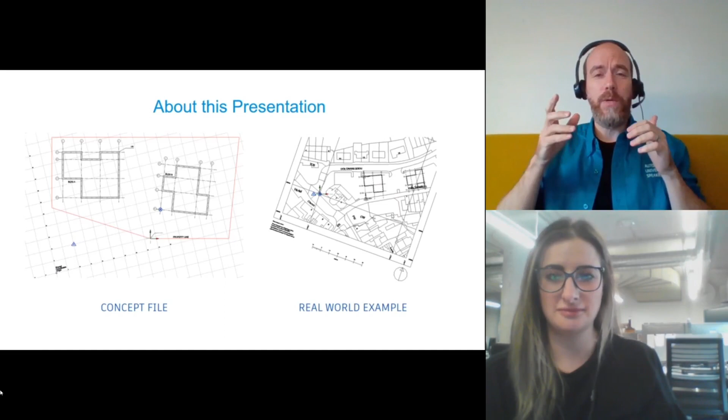But the other one, people ask me again and again, okay that's the concept, but how do you apply it in a real world example? In this case, I took an example just like I would have done when I was working in the UK. This site was situated in Wales, using a real coordinate system, and I tried to set it up and show it to you. So hopefully this is giving you guys a bit more of an opportunity.

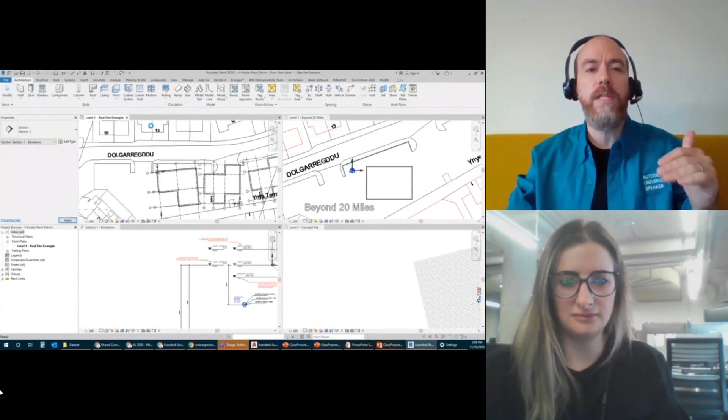So the whole question of clipped or unclipped things, a lot of this will come up. Let me just maximize this. There we go.

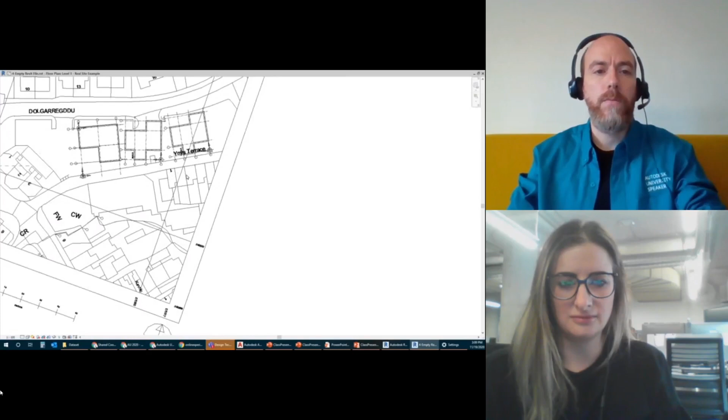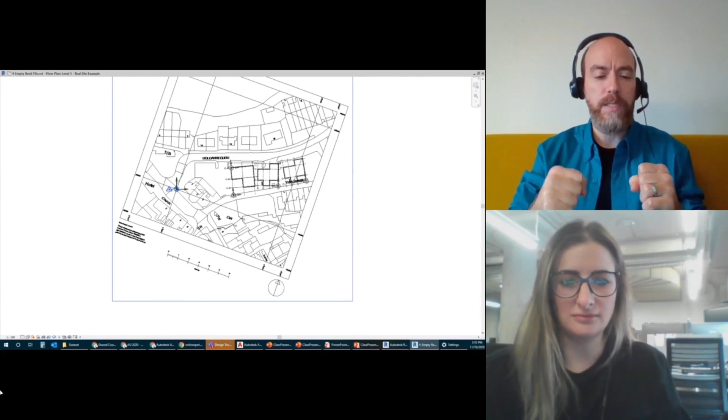A lot of this will be, if it's unclipped, the coordinates can update and it doesn't move or stay in its specific spot. The one issue you may have is that if you do a zoom extents, you may end up with something like this, where your survey point is located in the real world origin and your file updates. Besides that, in my experience, it doesn't really matter if it's clipped or unclipped, other than the fact that it's going to lead to you having to do things like this, where it's way off to the side and you have to zoom in.

But the actual behavior of acquiring the coordinates, it shouldn't affect the actual acquisition of the coordinates.

Awesome, okay, next. So the next one that we have here is a little bit longer, so I'm going to read it word for word for you.

It says: most of the surveys we receive are in a localized coordinate system. When we start a Revit project, we simply link in the CAD file using origin to origin and then acquire its coordinates. We then unclip the survey point and position it to a relevant boundary. We carry our checks between the CAD and Revit model, and everything seems fine. Does this process seem okay? We don't normally get issues with the 20-mile mark.

So the 20-mile mark - okay, so if I understand what they said correctly, if the files are located locally and you're linking them in, and you're not getting any issue with the 20-mile limit, as long as those files are being linked in... because they said they have localized files.

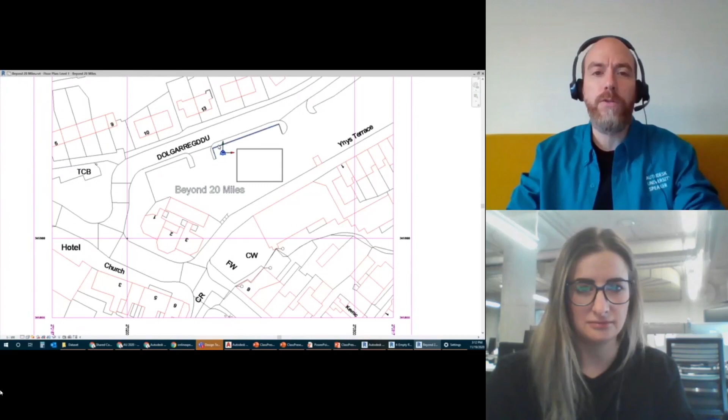Because there's some people that have linked in files and said, oh, there's no real problem with it, because you can see I can link in the file and everything looks fine about it. And this was a file where the background is blocked because it's beyond 20 miles. But if I actually zoom in here, what you will start to see is multiple lines, and you can sort of see how there's a secondary - the lines are not actually lined up.

That's because the CAD file in the background is actually jumping around. So you can see that even though I traced that CAD file, that's actually what's going to geometrically happen if things are beyond 20 miles.

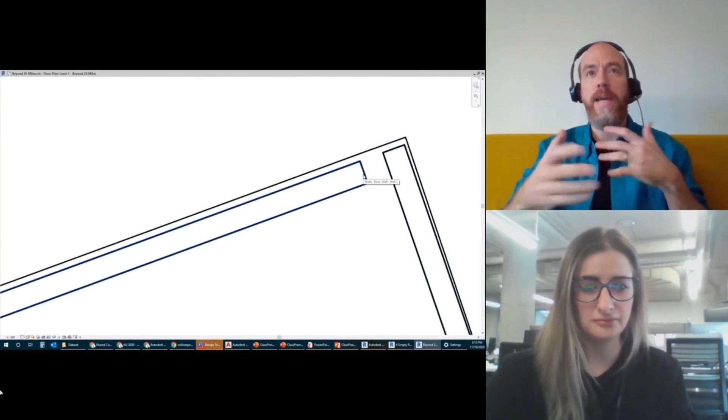If you're linking stuff in and it's actually coming in fine where it is because it's been localized, it's not beyond the 20-mile limit, you're probably okay.

The main thing, as I try to explain in all of my recorded sessions, is as long as whatever the coordinates are that you read off that survey file - if you're trying to put in a spot coordinate on it in CAD, and that same spot coordinate you pull inside of Revit is the same - it typically is okay.

But what I would do beyond that, going back to whether it's okay regarding the 20 miles, is look at your CAD and see if it's doing this jumping around. If it is, you may still have a problem with it, because graphically I'm not certain if this is actually going to be okay and whether or not the coordinates are going to report correctly, because right now the CAD is jumping all over the place, so I don't trust it.

That's why I localize my files.

Okay, awesome, thank you. The next one we have here is, how does shared coordinates affect Navisworks and IFC formats? Okay, they do affect it.

Like I said, there's so much to cover inside the session. The main thing to understand in doing that - let me see if I can show you guys a quick example here.

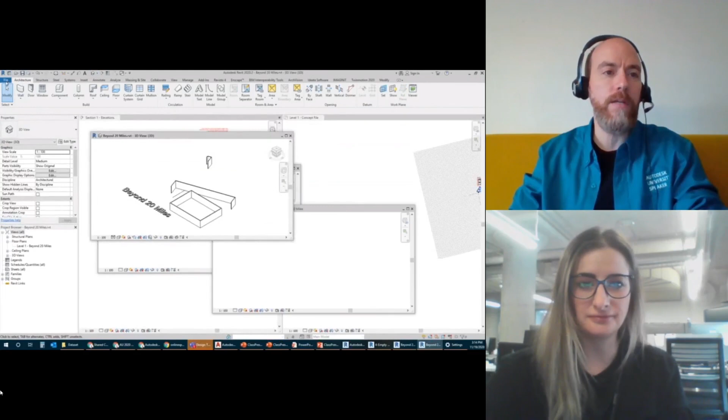So if we were to jump into this, I'm just going into a 3D view here, so that whenever you go in and you're exporting, either to Navisworks or otherwise, there are settings in here. Typically what you want to do is have your shared coordinates set up for your site.

Let me bring it back onto my screen here. So where you see coordinates shared - I actually opened up the settings within IFC as well. I'm not going to demo it on screen, just conscious of time, but there are ways that you can set it by shared coordinates as well.

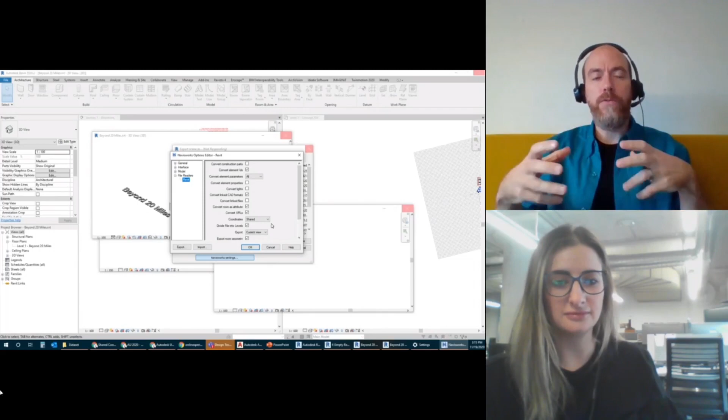This is, again, if you're dealing with stuff where you're trying to coordinate things across real world examples, like a site, all set out in the real world, you'll want to make sure that's all set to shared, and have all the consultants working off the same thing. Then your Navisworks files will all drop in right on top of each other as if they're out in the real world, all coordinated. Because if you don't do that, they'll all come in origin to origin and be all over the place, and you have to manually align them all.

So, without going into too much detail, that's basically - yes, they are still affected that way.

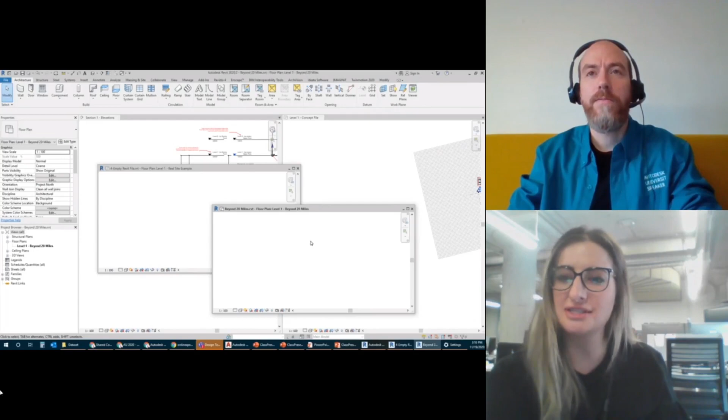Awesome, thanks Craig. So the next one we have is: why can't I modify or publish shared coordinates on BIM 360? I have a civil Revit file publishing to the architectural Revit file, which then publishes to all other discipline Revit files. I set up shared coordinates and publish prior to uploading to BIM 360, but sometimes the building moves during the process.

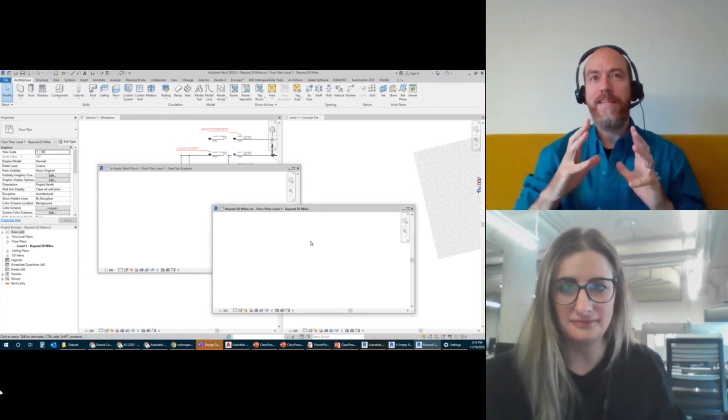I'm not officially from Autodesk, so I can't officially answer that question. I actually happened to catch a conversation on Twitter where somebody was saying the same thing this morning. I don't know entirely why BIM 360 acts that way.

The publishing, from what I've understood, won't work because, as I've said in my session, publishing is reaching into the other model and pushing that information from your Revit file into another. For some reason, BIM 360 doesn't like that. However, the actual acquiring of it, because it doesn't affect the other file, you should be able to do that.

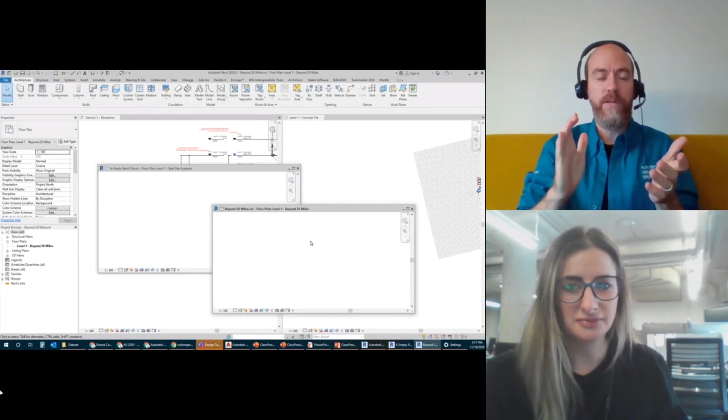But updating the files later on, that's unfortunately where BIM 360 won't let you change the location. For example, you can't grab the building in the site file, move it into a new position, and save that location back, like you normally could on other systems like Revit servers and network drives. I believe you can still go in and update the coordinates at a specific point, but you'd have to go into each and every single model separately to do that. So it's an unfortunate pain.

I don't know - Autodesk might have an answer for us one of these days, or they might update BIM 360 to allow it. But at this point, publishing on BIM 360 from one file to the other isn't an option. Awesome, thanks Craig.

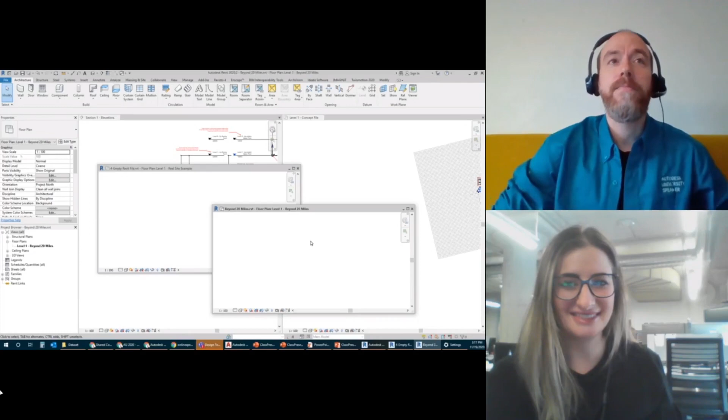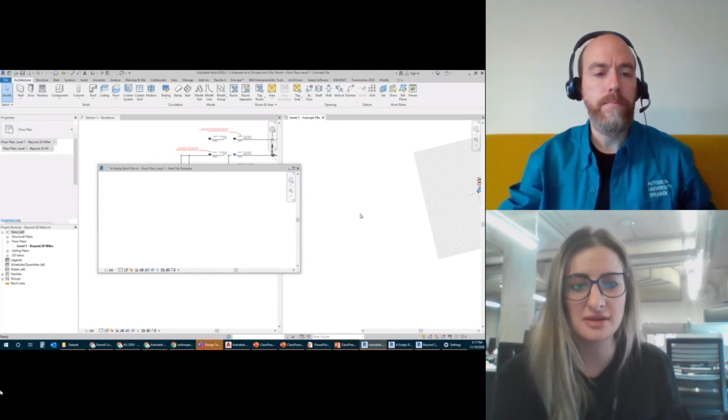So the next one speaks to a couple different questions actually. They want to know how multiple buildings on the same site are affected by shared coordinates, and what's a great process to set that up - for example, a campus site that has multiple different buildings and different shared coordinates per building. What does that process look like? Okay, and that is a lot of what we already covered.

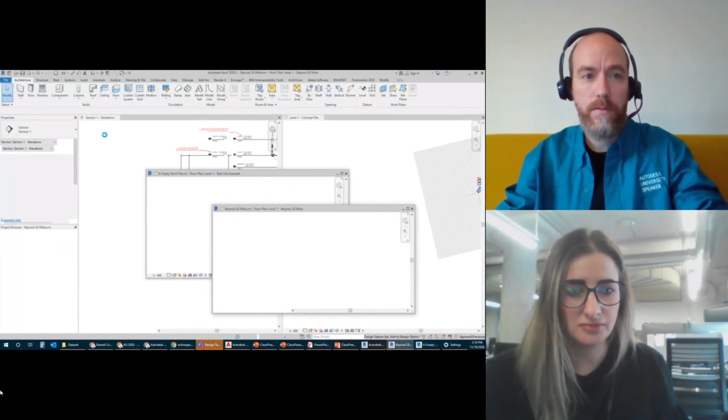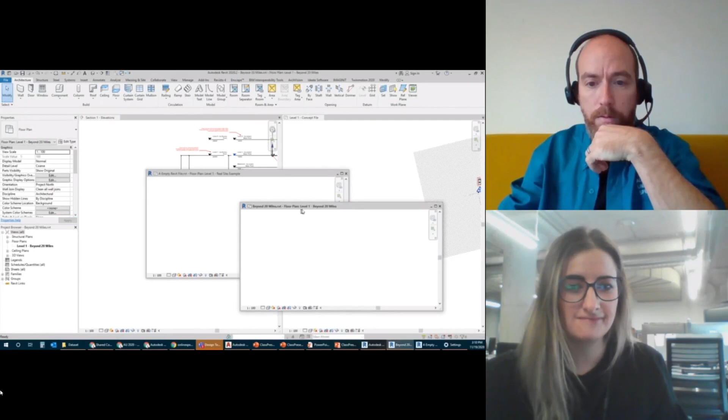Let me just see if I can bring it back here. We've got the concept file - there we go. Let me just get back to my... hold on a second. So in my tutorial that I did in my main class, if you haven't had a chance to view it yet - let me go to an example of a concept. Hold on a second, where is it... sorry, I'm just making sure you guys can see. In my main class, that's what I covered off - how to actually set up a building on the site. Let me just bring that up.

Oh yeah, there we go. Sorry, it was zoomed in so I couldn't see it.

Okay, so dealing with a site file, campus file, I think was the question. The main class I've got, if you haven't watched my full video tutorial which is one hour, explains how I would go through that process. I would typically set up my site file, which is kind of what I have on the screen here, and with that I would be linking in my separate buildings as separate Revit files that are linked in.

Somebody made a note that they've been trying to convince people for years to do a site file that's separate from a building file. I always did this because you can set up your site file using shared coordinates, setting up the real world coordinates so you can specify here's my setting out for my whole project. I know this is a real world coordinate. You can drop in spot coordinates and see how they relate to whatever real world coordinate systems you're using, and then position your buildings on that. If your buildings update at any point, you can go in and update the coordinates for them and they move around on the site.

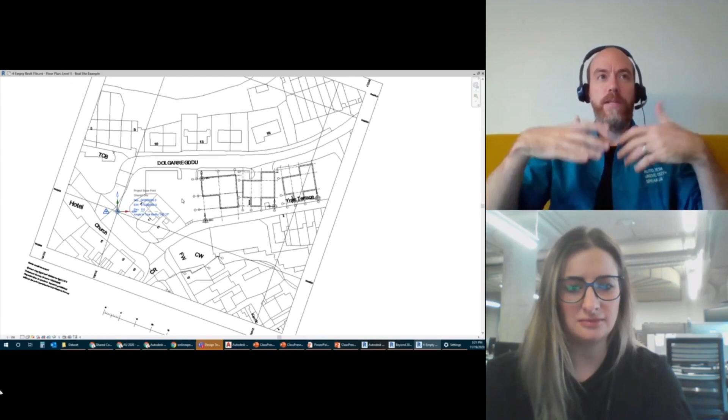As a very basic thing, it's one of those where you should watch the video tutorials, download the files that I've got in my data set, run through that process, and it should give you a fundamental understanding of how to set it out.

The next one is maybe a tricky one for you. Have you ever had to coordinate with a point cloud file? And if so, how did you deal with the 20-mile limit? Did you have to truncate the point cloud site datum?

Wait, so the second part of that, what did you say? The point cloud - had, yes, how did you deal with the 20-mile limit? And did you have to truncate the point cloud site datum?

Okay, if you're dealing with anything where it's point cloud data, in all the models we've worked with, we've typically set them out using more local coordinates - they're not set out at miles from their origin.

I personally haven't - going back to the initial part of the question, have I worked a lot with point clouds in real world coordinates? No, I haven't. But typically if you're running into issues with 20-mile limits, try to get the data back closer to the origin point as much as possible. So if for some reason somebody created a point cloud where the actual origin point is miles and miles away, beyond the 20 miles, you'd probably need to localize it.

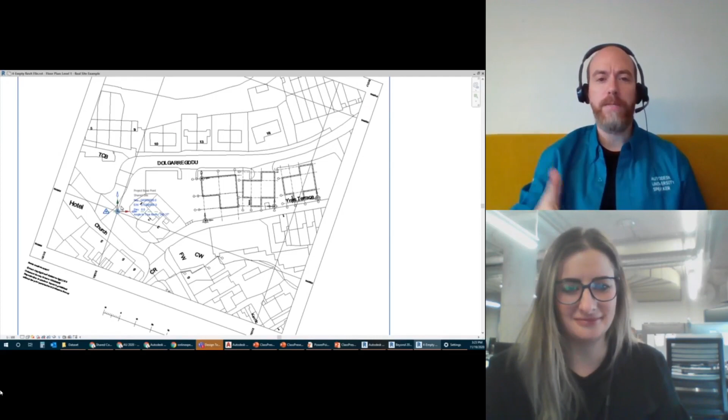Basically, if the files are not set up - in fact, as I went through my tutorial, I even showed you guys that if the structural model here within building A and the building A architecture don't actually align because they were created with two different origin points, you basically just at some point have to align the two. One of them has to acquire, one of them has to publish. So in this whole thing, somebody is going to be setting out the coordinate system.

So if you start out by saying, okay, the prime consultant is the architectural team and they're establishing coordinates, then once building A's architectural model knows that's the coordinate system, it's actually quite easy to do at that point, even if the files haven't done a handshake at all.

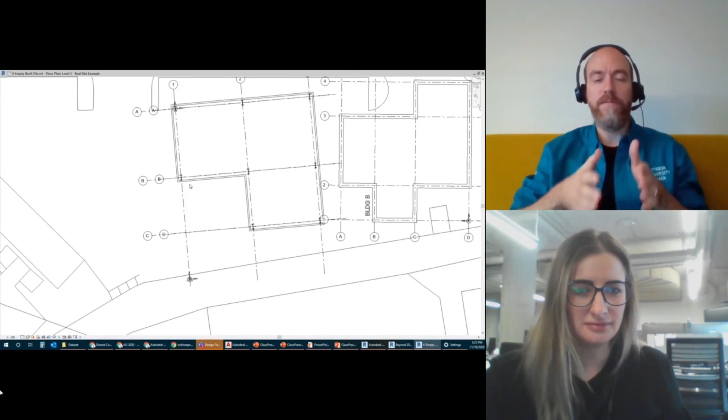Because what will happen is you basically just pick the file and say acquire from this file, and your file will just suddenly adopt their shared coordinates. If you've done shared coordinates, but then the coordinate system updates because suddenly everyone decided this project was set out around a local origin point on the corner of the property line, and now they want it in real world, you can also do that. You just have to go into each file and go through a similar process to what I showed you in the example: pick points and say specify coordinates at point, type in the coordinates, and then you'd be able to align those models back together. So it is something you can do later on in a project. It just means a bit more legwork of going into each file separately and updating it so they all align back together using shared coordinates.

So the next question is more about you, Craig. They want to know if you have your own specific YouTube channel that has no time restraints, so you can start your coordinates sessions there.

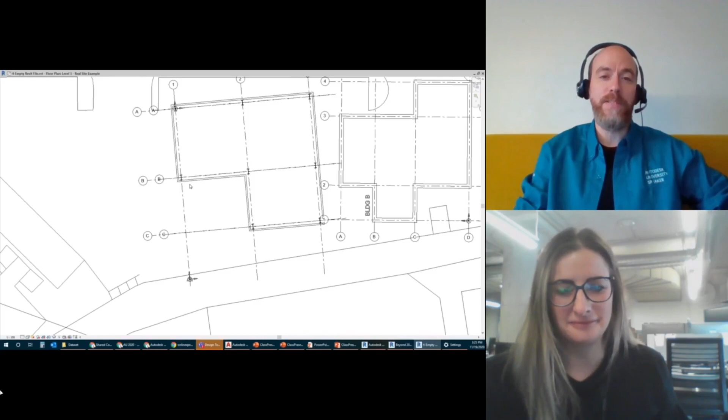To be honest, I haven't actually done that until now. I have now - I've gone on YouTube and uploaded a video that I produced for Autodesk. I've got one video in there so far that's bonus material showing you how to link - it was the one where I started linking the same model twice in two locations. I am going to try to add more videos, so if you search for it, it may take a while until it shows up when you search for Craig, but yes, I will be posting more videos.

Perfect, you have a very lovely fan base here. The next one is more about the process here.

So it says: I link in the architectural model and acquire their coordinates. Coordinates match, base and survey points match, yet when I link in my model, it sits a meter too high. Would that be a physical alignment required on their part, or is there something else I should be doing coordinates-wise?

Okay, so by the sounds of it, if they've acquired coordinates - I'm going to guess structural, for example, or mechanical, acquires the coordinates from the architectural. If they're now saying that the architectural model, if you've given your model back to the architectural team and it's sitting a meter too high...

Check with them that they have linked your model in by shared coordinates, because there are times when they'll say 'oh, we linked your file back in, it's not coming in the right place,' and they actually linked it origin to origin. But beyond that, if they did their job and linked it by shared coordinates, then it probably means that your file, when you were looking at it, looked like it was in the right spot, but was actually sitting - you started your file, for example, a meter higher than they did.

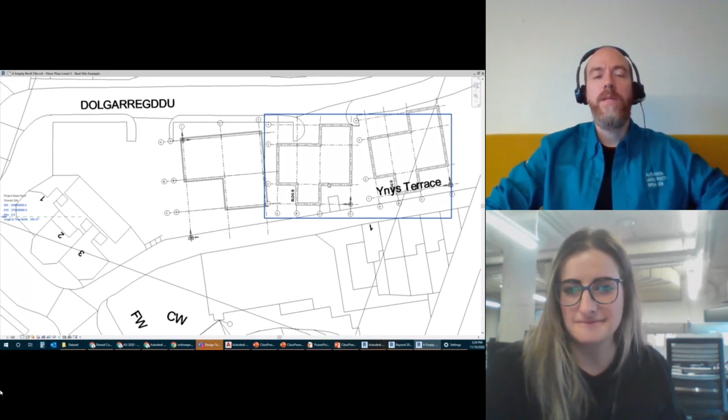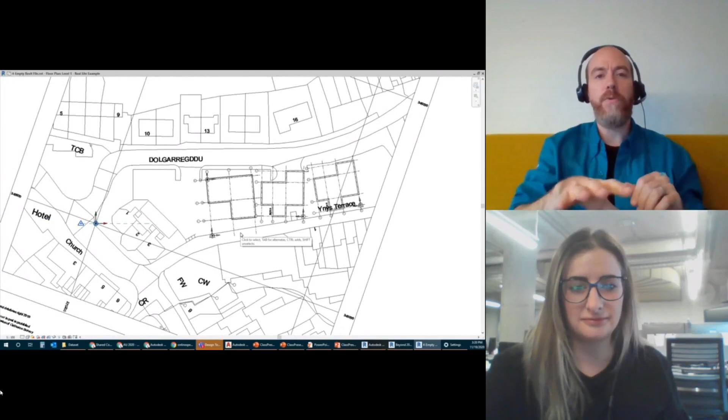It is inside the CAD file, and if you're still a little confused about this, go back and watch the video tutorial on the website on AU, where I show how I localize a file. This is an example. This CAD file in the background has the Ordnance Survey grid from the UK, and I picked a local setting out point, so I had to move the CAD file so that grid line is sitting at 0 by 0 in CAD.

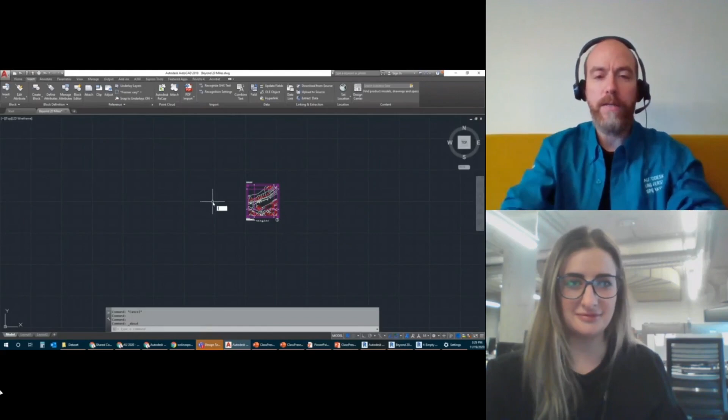So let me go back to my AutoCAD. As an example, if I'm in AutoCAD and I do a line from 0 by 0, you can see it's way down there, right? That's not going to work. That's going to be beyond the 20 miles.

But if I go in here and grab that point and actually localize that at the 0 by 0, as I've shown in my tutorials in the main video, as long as all the geometry is contained within the 20 mile, Revit will not give you an issue. That means changing a survey, yes, but if you're doing it in a controlled, repeatable manner, you can do it, because you can always tell people where that origin point is.

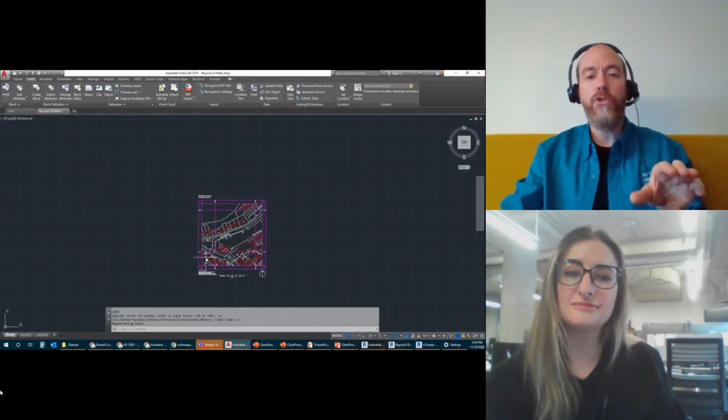Also make sure that if you still get that error, it may be, for example, this one block - that block's origin point is like thousands of miles away. Therefore it's still going to generate that error. So you also have to make sure. I've been in projects where the trees were defined with their origin point like 250,000 miles away, and it still gave that message.

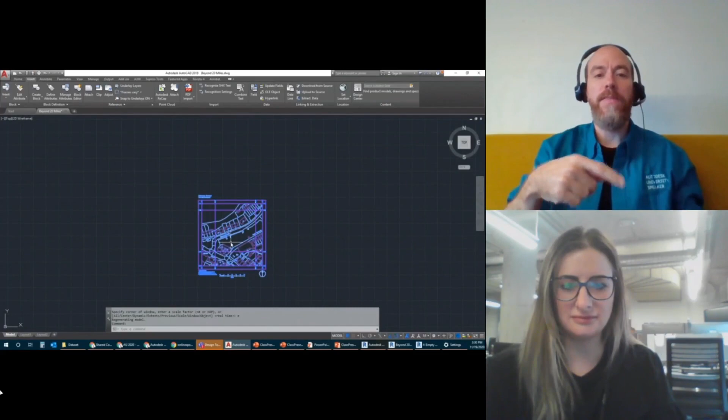So sometimes people will sit there and explode it and get rid of all blocks in the file. I'm not saying you want to do this on your project - please don't do it because people will hate you for it. But if you are in a project, this is something you can do to kind of mitigate that.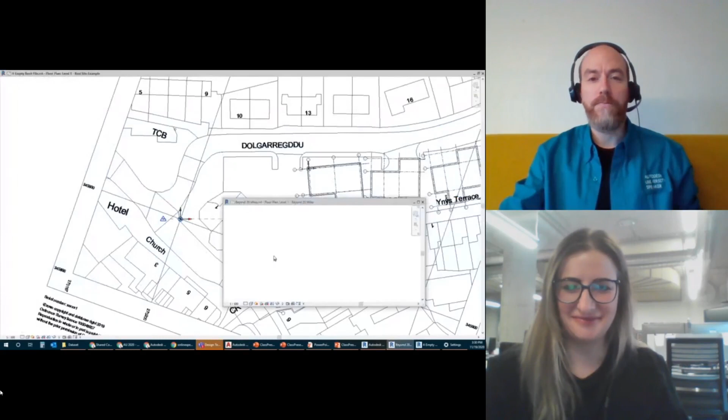Awesome. Thanks, Craig. So the next one is a troubleshooting question, actually.

This is a common one that I think a lot of firms and consultants hear - they say the architect accidentally moved their survey point and now our MEP isn't aligning with theirs. They're saying they fixed their shared coordinates and it's appearing fine on their end, but now our elements aren't aligning to the architectural model as they should. What is the best workflow to troubleshoot this?

This is one thing I didn't mention in any of my sessions, which is worth noting: if you're going to set up something like a common origin point that things are being coordinated around for the project, where you say this point on the project should read this in real world coordinates - as an example, it might be that I use a common point on the grid line as a setting out point, but it might be you say the corner of the property line.

If you don't think your building's going to move around at all, I wouldn't typically pick a grid line because buildings do move - they might shift a foot left or right or something like that - but property lines don't typically move. Pick a corner of a property line, get the spot coordinates from it, put that into the BIM execution plan. Whoever is prime, put it into the BIM execution plan.

That should be your one go-to - if you go to your file and do a report and the coordinates are reading correctly, but the architectural team isn't, then you know who's to blame, and you can go and point that out to them.

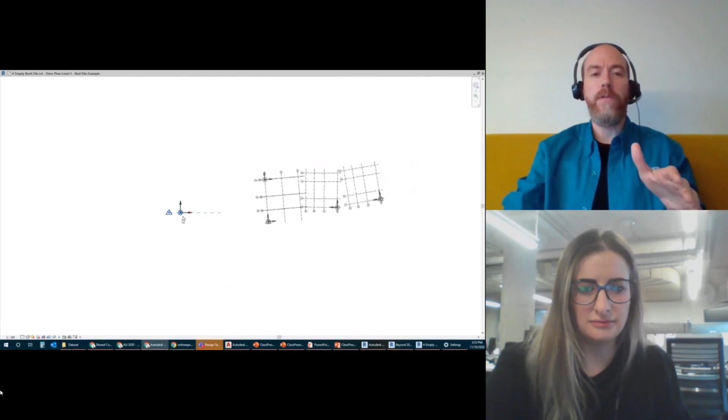In my examples here, I don't typically localize my files by just any point, I want a certain point that I can link. In this case, I link in my CAD files. If somebody gave me, like in the UK, everybody works on the Ordnance Survey Grid, at least the architectural teams.

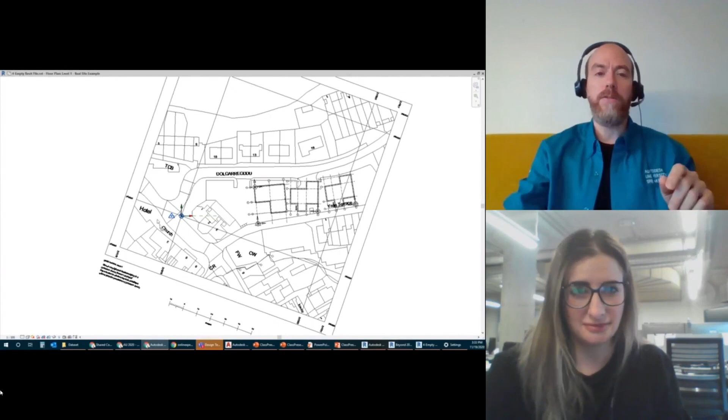Because if you suddenly get a new survey, you can say, well, I want that survey set out on the Ordnance Survey Grid. And if they do that, you can place that marker, this little 0 by 0 marker, on that point. I can do that in any of the files by basically moving it to a certain round number coordinate point.

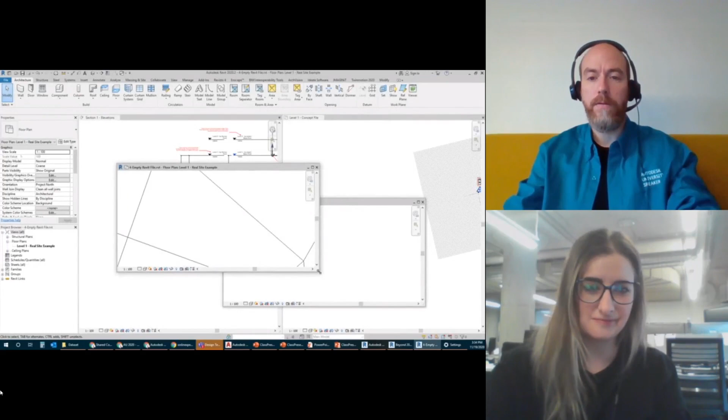So if I actually report on the shared coordinates for that file, let me just see if I can. What you should see is these numbers show up, the ones that are on the grid line. And that's why I use a shared coordinate or a grid line in this case.

If I go in here, no, I don't want to save. If I pick that, you should see those numbers will now read the same as those grid lines that you saw on the outside. And that's why I use that point.

Now, the problem with that is you can't really say that's the common point for the project. So what you may need to do is say, okay, we want a particular point that's actually on the site that we can pick and that is in everybody's file. So you might use the corner of a property line or something like that.

I wouldn't use grid lines because the buildings and grid lines do move depending on the structure of the building as it develops. Property lines are a better place to go. It's something you have to talk to the team about, coordinate, and record as part of your BIM execution plan.

Thanks, Craig. Have you ever encountered hosted families jumping around or deleting while utilizing shared coordinates?

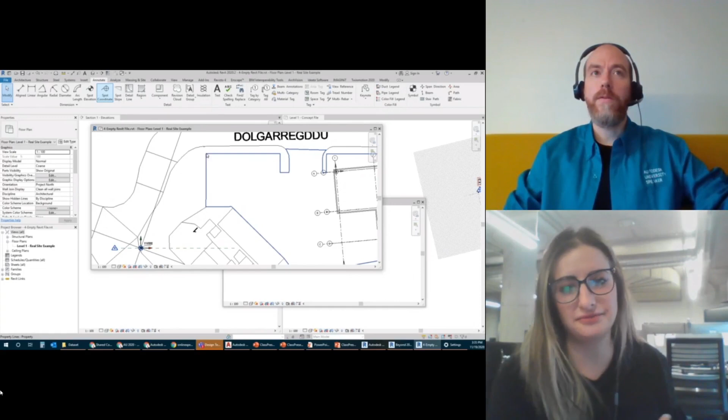Oh, that's one of those that comes up a lot whenever you're dealing with links in general. Yes, for hosted elements, usually if it's hosted to a face, it's typically better than if it's hosted to, like, if you have a wall hosted element, those typically will give you more issues than if it's something face based.

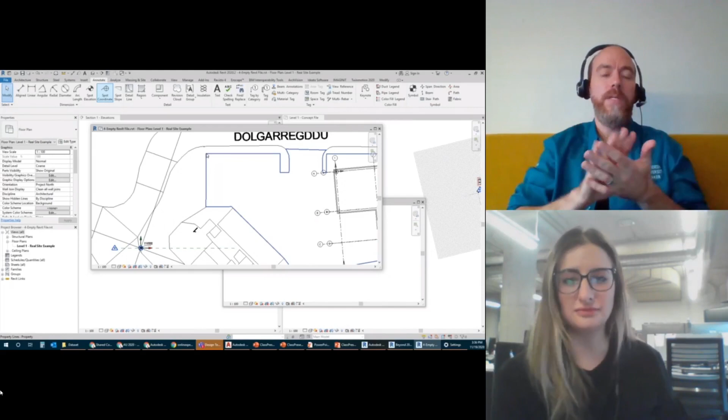But I haven't seen, none of those should move or have issues as long as the files are... as long as the files don't actually separate. This is where it gets tricky, because if you establish your shared coordinates and then as you're working through it, somebody says we need to update your shared coordinates, you may need to disable your shared coordinates, redefine them, and then re-enable them.

And then reload a link to make sure the files don't suddenly separate. But the shared coordinates themselves shouldn't cause a hosted element to move. It's more whether or not the shared coordinates are changed and the files are actually moving together or apart. Does that make sense?

Awesome. So the next one stems from the fact that some people don't actually have the shared coordinates or the coordinate information at the onset of the project. So when they have to go back to the client, the owner, or the prime consultant to ask for this information, what's the key information they need to ask for to set this up properly? That is a brilliant question.

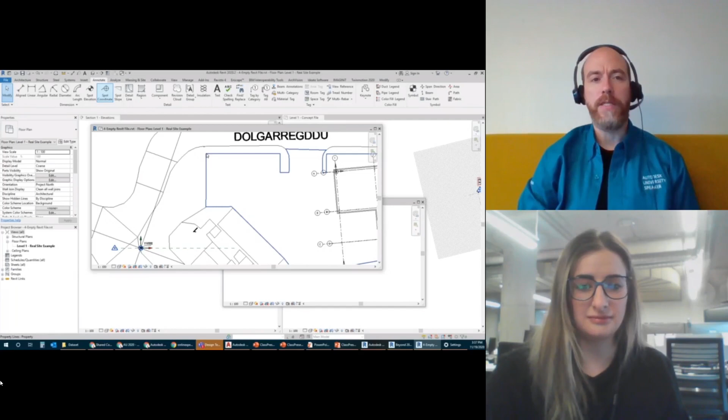And that's the thing, a lot of projects you're working on don't have a common setting out point. This is one where, when I was dealing with this in the UK, it was a lot easier because the Ordnance Survey is their standard grid that the architectural teams worked on, and everybody kind of used it.

So you could very easily start up a project. You were given a file - in this case, this isn't even a survey per se, it's not like somebody went out and measured it on site. This is one you purchase as a general overview, and you could always start your projects with this if you're dealing with a project where you don't know your local setup, you're not as familiar with it, or it's a place that doesn't have a coordinate system.

A lot of this you can research and dig into, and you might have one you can use. You can talk to local surveyors and establish one. But if you really aren't sure, a lot of this is usually set out by whatever the local surveying groups will use. If you don't have a particular site or real world coordinate system, what I'd typically do is pick something in the area, like a corner of a property line, as a local point and start from that.

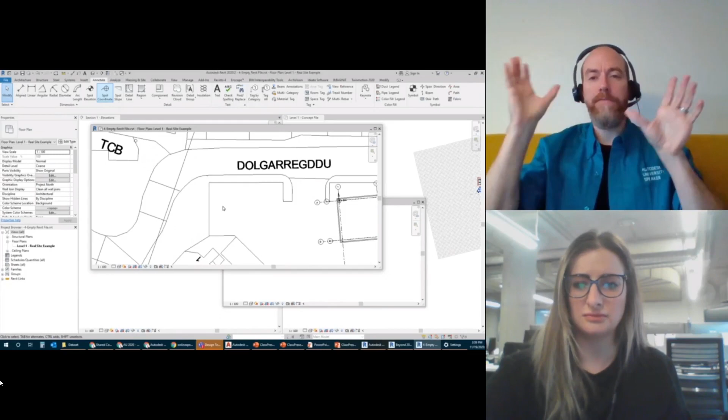You're still better off establishing something that everybody on the team knows as a local point. It's easier because if you just link their files origin to origin, your building could be floating somewhere, and the actual origin might be in the middle of this white space - it's very hard for everybody to spot-coordinate on, say, the corner of a property line and know what that's set out in relation to. So I'd typically use the corner of a property line, or some benchmark in the area, as a starting point.

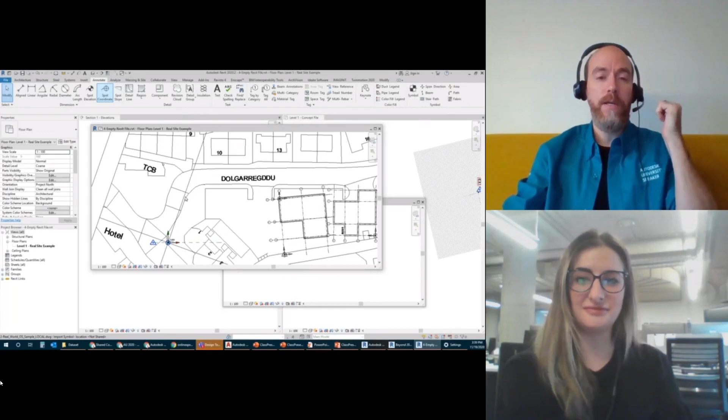And then if things change and you guys get real world coordinates, and suddenly a survey comes in and they say, actually we used a benchmark that's 250,000 miles that way, then you can update your system then. It's a bit of work, but you can do it.

So the next one is actually for a user that isn't currently using shared coordinates, but wants to implement it at their firm. What would you describe for him to bring to their leadership team - the pros and cons of implementing it into their Revit workflow?

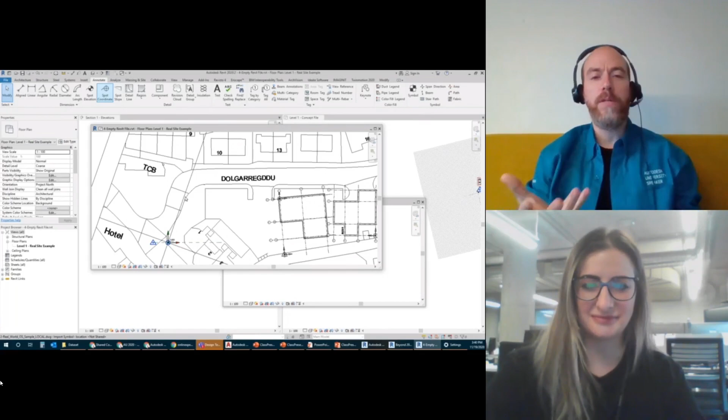Oh, I like that one. Okay, pros - besides showing them my slide deck and pulling a few points out of it, the pros are things like with shared coordinates you want to get everybody on a consistent system. If you have your files just linked in, let's say somebody accidentally moves a file - with shared coordinates activated, it will prompt the user asking if they want to save this back to the other file. It will give messages, and if somebody then relinks the file and you've changed the coordinate system, it actually moves them.

In some ways, yes, it causes more complications, but at least you'll catch the fact that it's happened. I've had projects where people linked them in by origin and never initiated shared coordinates. As the project progressed, somebody accidentally bumped one of them out by 15 millimeters, about half an inch, and nobody caught it. It caused such havoc later because we realized half the project had been modeled 15 millimeters out. So establishing this stuff right up front is better.

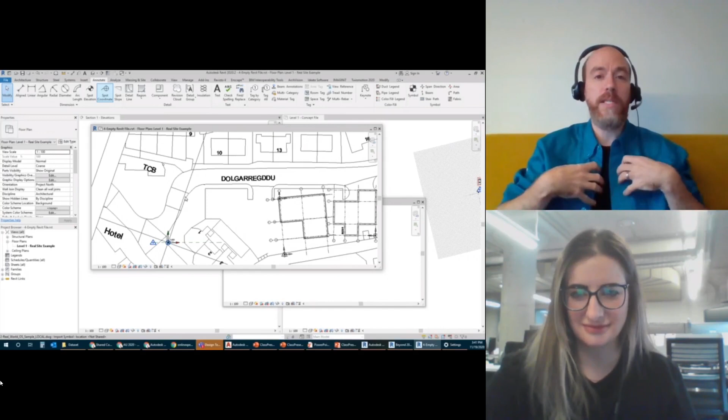The other thing is this is the way the industry is going. If you aren't working on projects setting things out using coordinates now, picture 5 or 10 years down the road when drones are being used to survey the site, or every single project is using a robotic total station to set out exact positions for structural elements going in on site. I've been on a site where they set out every single house by positioning a marker and saying, okay, the laser hit right here, that's where we drill.

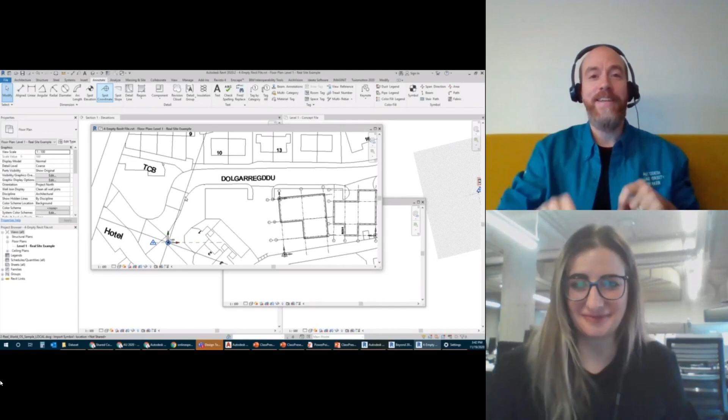So if you don't get that right, as I said in my presentation, you could have a building that sits across a property line, which isn't a good situation to be in. Show them that article and say we want to avoid that in the future. So those are a few of the pros and cons. Hopefully that gives you a sense of it. You'll maybe have to upload that material to the downloadable materials for this course, Krigh. It's a good case for it.

The next one we have—first, a compliment to you. Your webinar is amazing. Is there any way you can make it so that adjusting the angle won't impact any views on sheets?

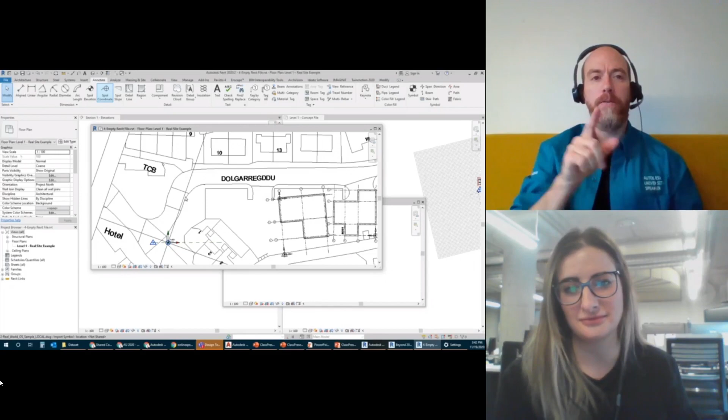Adjusting the angle won't... okay, I'm going to guess what they're talking about. If you're working on your views on sheets—actually hold on, let me bring this up. Okay, your views on sheets. Sorry, my computer is a little slow today. So in this case, if your project is set to project north, right here, changing the angle to true north should not affect any views on your sheets.

If your project is set to true north and you update your true north angle, this will affect your buildings on sheets. If, on the other hand, you're going up here and using this Manage—let's see, is it always—Manage Position and Rotate Your Project North function, if you're using that, first please watch my full webinar where I explain why you shouldn't use that tool, because certain geometry ignores it.

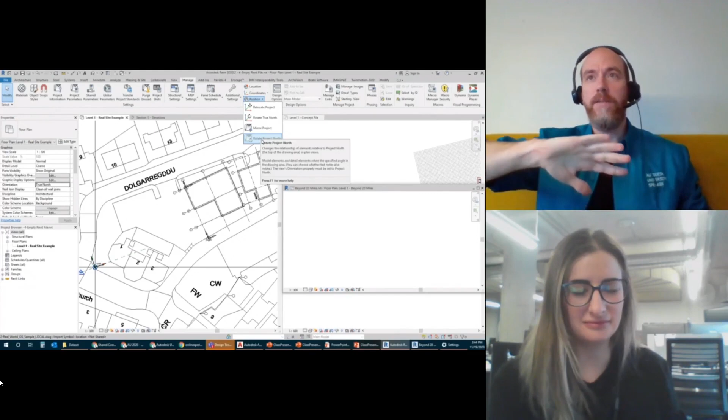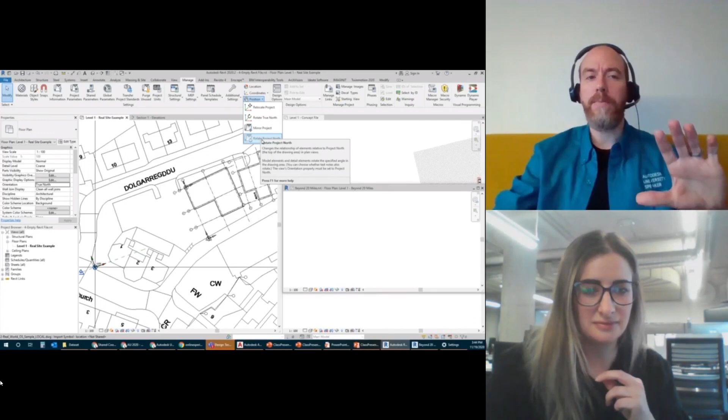But the other thing is that function will affect the orientation of everything on the sheets, and that's again why I wouldn't use it. I typically, if you need to reorient stuff in a certain way, use scope boxes, but otherwise watch my tutorial and the process I go through in my full webinar, and try to avoid using that function. And like I said, if you're rotating your true north, you kind of want it to affect things, because that is the angle to true north. I hope that answers the question.

Awesome, thanks Krigh. So the next one is: can I set up a site placeholder file inside my template file so I can get my view template correct?

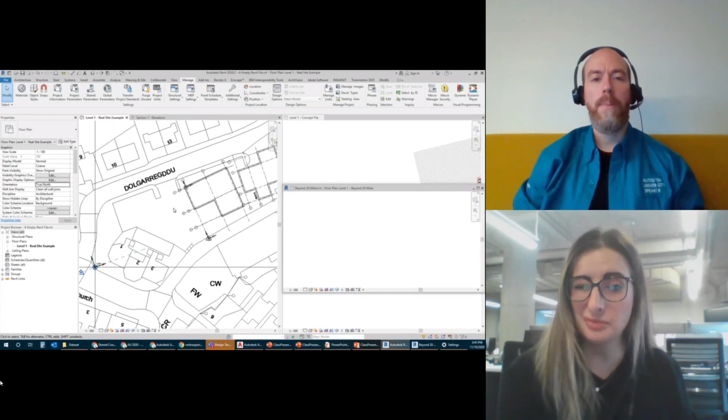Okay, say that one more time. Can I set up a site placeholder file? So creating that site file inside a template file so I can get my view template correct.

Yes, because in some ways your view—okay, so you can set up your view templates, you can set up your site file so that it has everything oriented. The only thing you won't be able to do is actually set out your shared coordinates.

So in this case, like this is where, for example, going back to my example that I've been using, that's real world here. Hold on, let me just go back to here. This one doesn't want to get off the screen. Hold on. Okay, there we go.

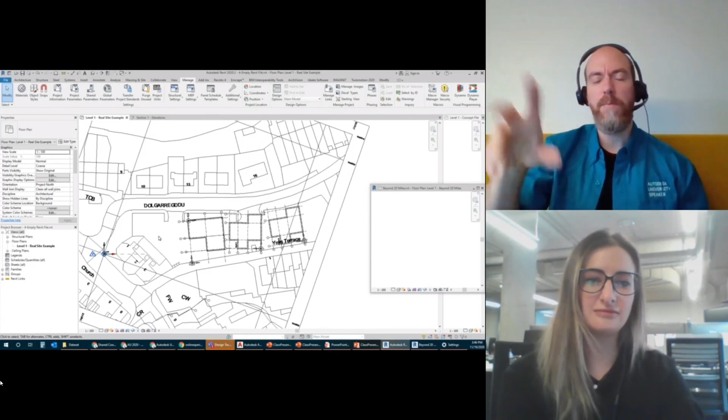This right here is my project north. Okay, so this is my—you can kind of see this. I've got a reference plane in here, and you can set up everything inside the site file. Put in your view template, you could put in graphics, you could put in a couple of basic elements. The only thing you're not really going to know is which orientation is true north. That's what's going to be set by your shared coordinates at a later time.

And if you're doing it inside the site file, the other thing is you can set up your view templates how you want them to be laid out, and then you're linking the buildings into that and positioning them like little Lego blocks on your site file. So it doesn't matter which way is up for them—it really is about you just starting your file here.

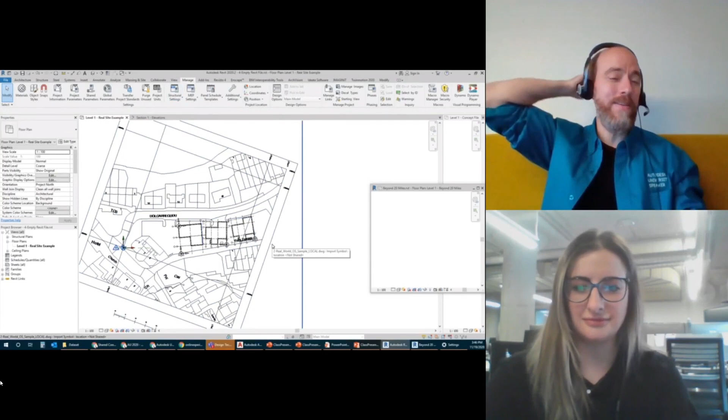And in this case, as I showed you guys in the full session, this file here—the CAD—is actually rotated, so the actual orientation for everything going up is what you see here. So you can set everything like that, and in theory you could even have that as a view on a sheet ready to go. You might have to change size or change sheets, but it could be set up that way.

Awesome, so we have a three-part question for you. It all ties together: how does coordinates apply to model elevations? When I acquire coordinates from a drawing, does it include a Z coordinate? Does that mean it moves the survey point away from sea level?

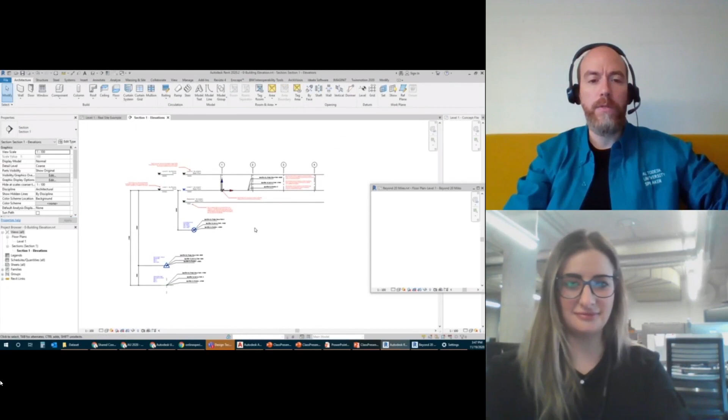Okay, so the first part is elevations. If any of you guys haven't downloaded the full data set, go to the AU website, back to the page where you found the link to this webinar, and you will find the data set. Inside that zipped file is how everything works in elevations.

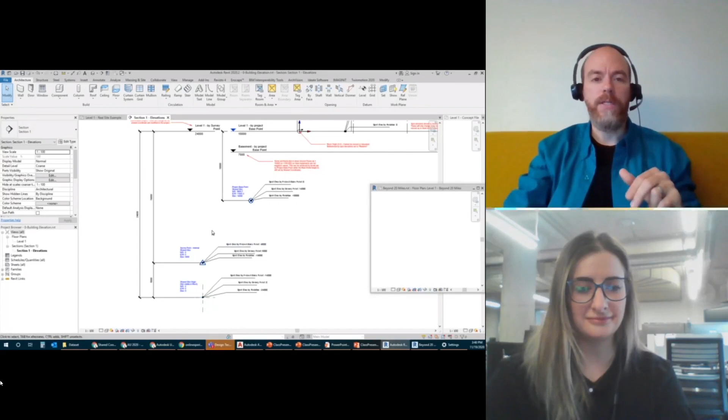Now, it doesn't have multiple models linked in, but the file can be set out so that, for example, your level 1 is at 24 meters above sea level, and this will position your origin point way down here by shared coordinates. So it's not your origin point in your Revit file - that's actually still sitting at your level.

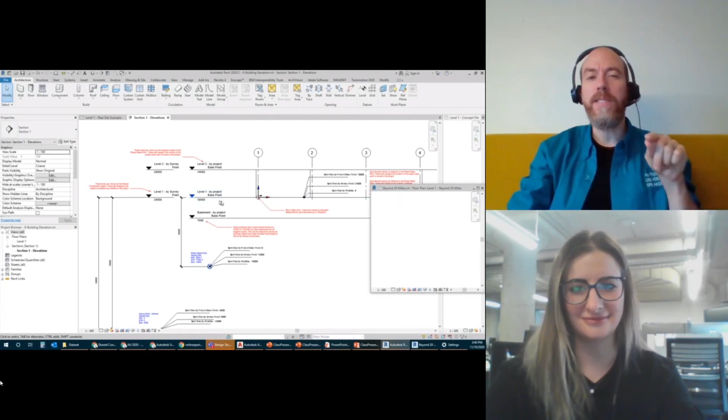Going back to the second bit - does it actually affect things if you acquire coordinates? Yes, it will. It will tell your model, and if your levels still aren't reading correctly, it may be because your levels are not set out by survey point. So keep that in mind - if they're set out by base point instead, your elevations might not be set correctly, but they actually do set by a real world elevation.

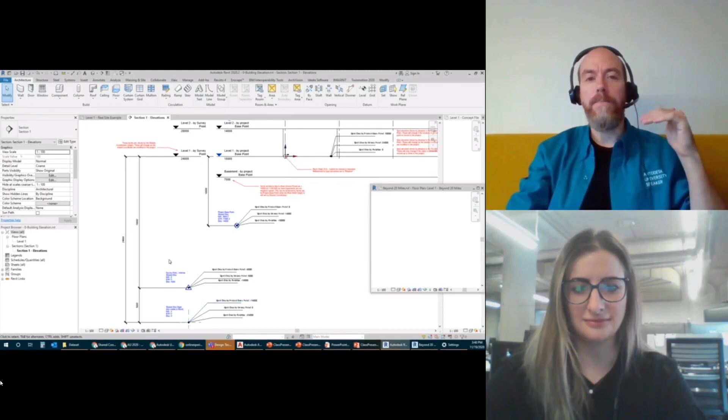I explained also that you can still get them to set out by project base point, because there are some architects that like to have their stuff set out by nice round numbers, so you can do that. But did I answer all three, or was there anything missing? No, I think you hit them all.

Okay, yeah, definitely. All right, so we have a best practice question: in your opinion, should you move the building to a location and acquire the shared coordinates, or should you input the coordinates into the building model and use the survey point and project base point?

Jumping back to the example here, if you were doing this model - let's say building A - and I was working on it and hadn't done the handshake yet, traditionally what I would do is link in my site file, move the site file around so my building looks like it's in the right spot, and then acquire from it. The reason I'd do that is just because it's easy - I'm lazy.

If you do, you could use the project base point and set it out, use the survey points and all that stuff, or go up and say specify coordinates at point. But the easiest part of shared coordinates is that initial acquire or publish. After that, it starts to get hard and you have to go through and update these values. In that initial one, I would take my site, crank it around my building file until it's in the right spot, and then say acquire - that now has done the handshake between the two.

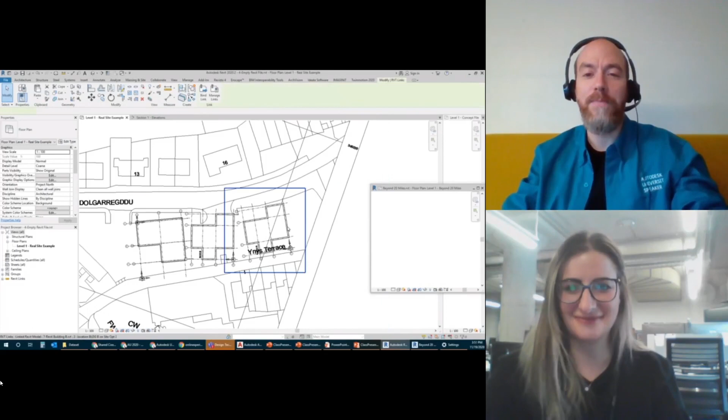Okay, so how do you do it without moving the file? So I did this example where this is actually the same model, and I'm going to show you guys what I did.

This one I did in the bonus material that I put on YouTube. If you can find it, it might take a few days before it filters up to the top. What I did here is I actually did it by moving it on the site.

The reason I did that is because I went over here. Let me bring this back onto the screen, and I disabled my shared coordinates. I did that because I didn't want to update this.

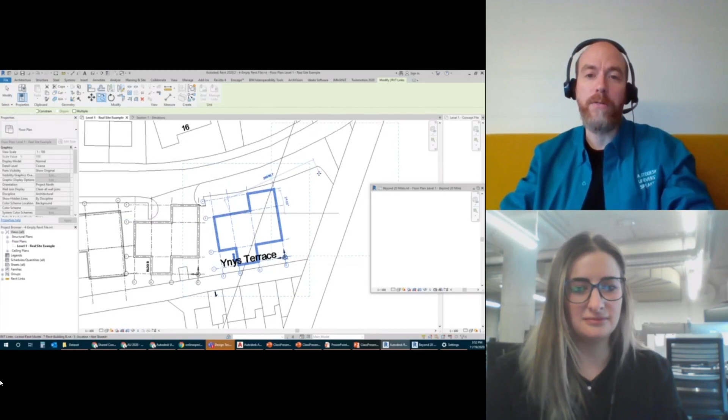Then what I did is I copy that model to a new position. Let's say we're doing a repeating house type down the street. Now that I've moved it to a new position I'm in my site file, and then I can go in here and say, okay, now I need to record this position.

And again, it comes on the wrong screen. You'll see that I have different ones in here. I've got in use, I've got on site, I've got option 2.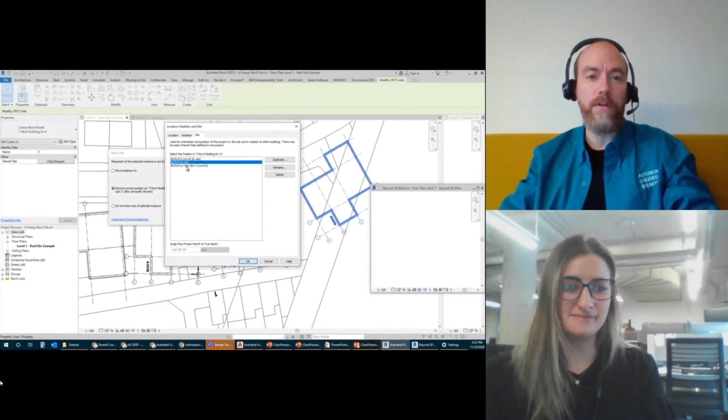So I can actually duplicate this now, and I can do, let's say, plot A2 location. What that'll do is it'll actually record this now as A2. And if I hit save, it will save that position back into that file.

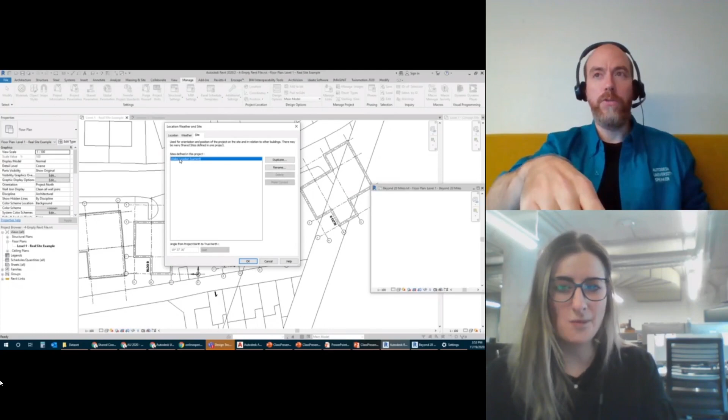Now, going back to the question, if you're inside the building file and you haven't updated it, or if you don't want to move it, this gets a little trickier, and I kind of show it in the bonus material. In this case, you have to remember, the reason it's not showing the additional sites here is because this is the actual site file. So the site file only knows one location.

The buildings know multiple locations. But if I was to, and I'm just doing this for the sake of saving time, because if I open up that other file and we've only got 7 minutes left, it's going to take me time to do.

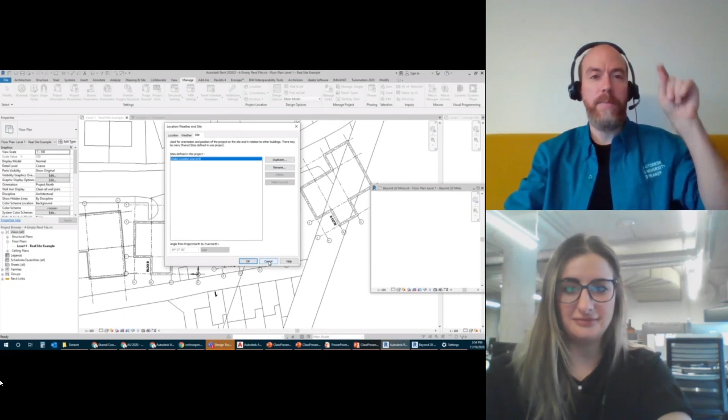But what I would do is I would go in here and duplicate. So if you were inside, let's say building B here, you would duplicate, and then once you duplicate it, set it as current, and then start to affect the coordinates by saying specify coordinates at point. If you do that, it will basically affect the second site, but not the original first one. So you'll be able to have site A and site B.

And that's what you see when I look at this model. If I go in here and click this, you will see that this one now actually has 4 different potential locations. I think one of them was the building, one was the building rotated 90 degrees on that one spot. So that's those two. And then I had a second one, which I called A2 as well. Sorry, a little confusing here—this one is also, maybe we should call it A3.

Awesome. So hopefully that answers that.

So we have another one on point clouds, and I know our experience is limited, but you might know of others in the industry who have done this. The comment is we've used shared coordinates for our point clouds, and the issue we have sometimes when we reopen the project, the point cloud will be off in space, and we have to reload the point cloud and get it back to the right position. Have you ever experienced something like this?

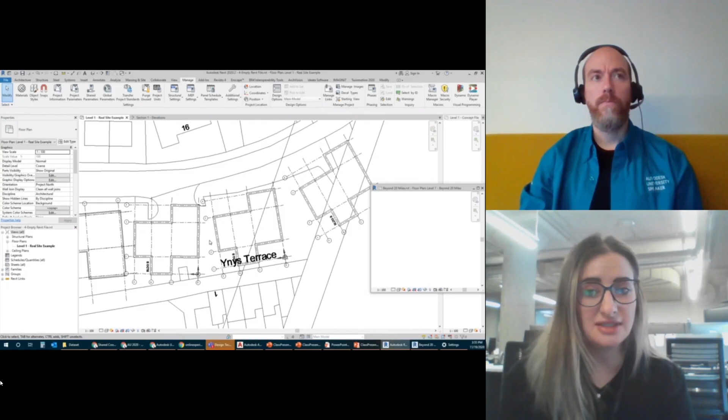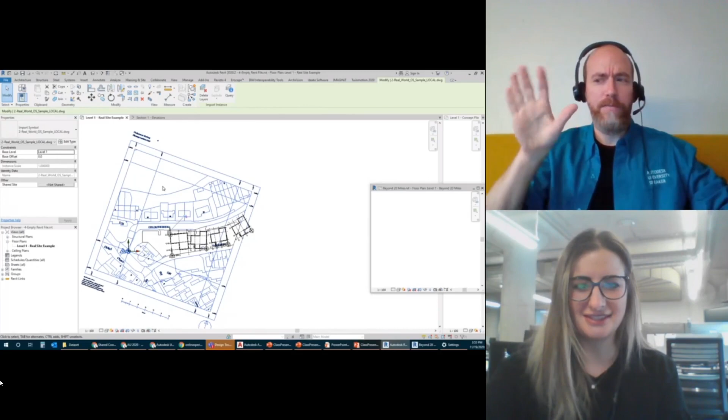No, apologies. Unfortunately, I haven't worked that much with point clouds, and I don't know what the issue is. The only thing, and it's completely unrelated to your question, is that sometimes the CAD files I've linked in will rotate themselves back after I've rotated them. I think that was more a function of when I linked them in, I set it to orient to view or something like that. But I don't know the answer to the point cloud one.

Okay, we'll give you another quick one here. So when specifying coordinates at a point, the model elements do not move relative to Revit's internal origin, but the survey origin is shifted relative to Revit's internal origin. Is this correct? Yes, it is. And so that is somebody who has moved closer to becoming a shared coordinate ninja.

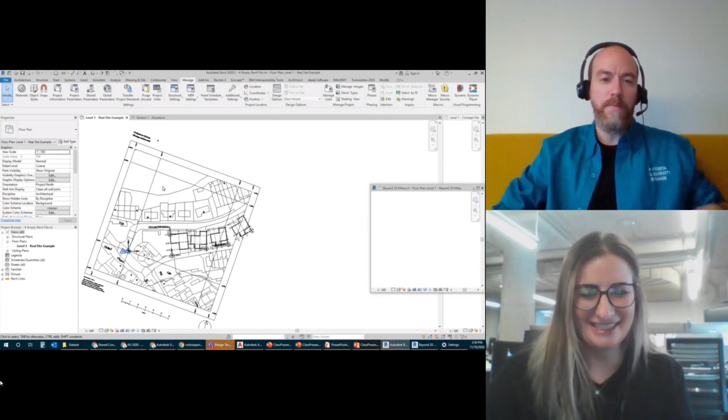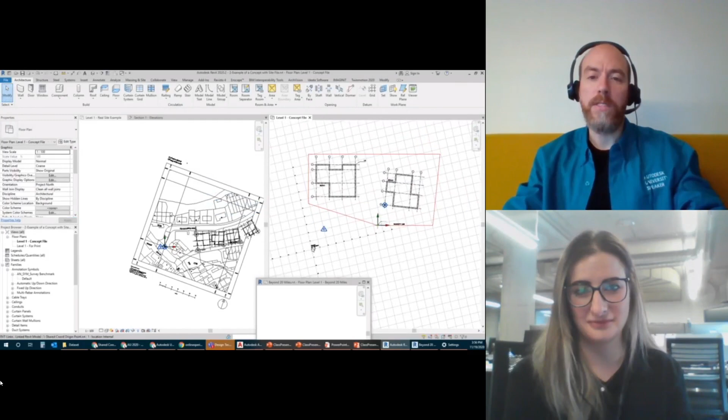The whole thing I covered in my session, it wasn't until recently that they showed you how the shared coordinate origin is revealed. Most people would argue that this means everything's moved away from the origin point. But no, if you specify coordinates at a point, basically what it's doing—if you've seen my other example, the concept file—it's moving everything in this file, the sort of setting out from the shared coordinates down here. But it's not necessarily moving the model itself relative to that origin point.

Yes, that's correct. Okay, so we've got 3 minutes left, just conscious that we can't go over our hour, but we've got maybe 3 minutes. We have a couple more questions, so I do want to ask this one.

A lot of people have noticed the excellent Welsh street names. What is your connection to Wales, and why is it in your presentation? Were you here on holidays? Were you visiting?

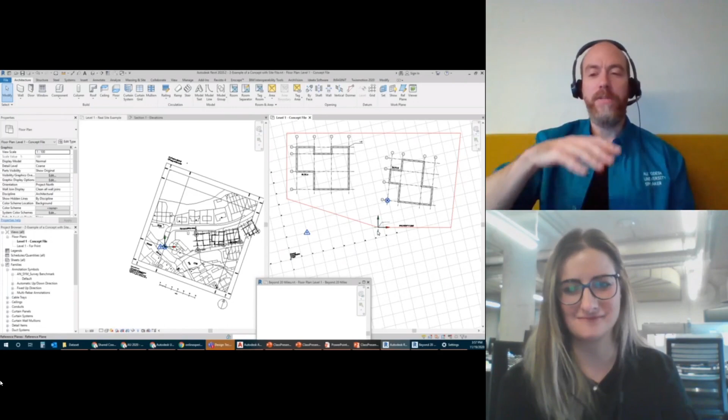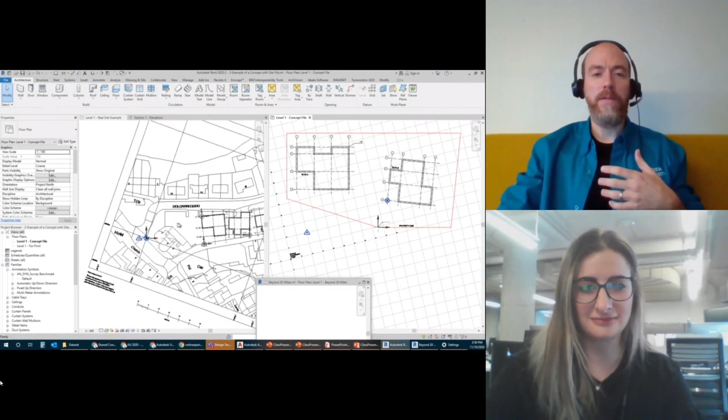No, this was one of those ones where, as I explained in my main tutorial, I spent 8 years in the UK, and because they have the Ordnance Survey Grid which goes over the entire United Kingdom, it just happens that when I was looking for an exercise file, I went to one of the suppliers that gives out sample files—I think it was UK Map Center or something like that. I've got it in my presentation, and when I downloaded the file, they said yes, you can use it with permission. To be honest, I didn't even know it was in Wales until I got a little curious and thought, wait a second, what is here? There's actually a retaining wall. I looked at it on Google Street View and looked at my real world location, and hence, yes, you're probably all confused about the Welsh names. I'm not Welsh, but I lived in the UK for 8 years, so that's the only connection there.

Definitely, well thanks for sharing, that's awesome. We have about 1 minute left, so to wrap it up, somebody wants to go against the grain of shared coordinates and ask if you would ever advise anybody not to use them on a project.

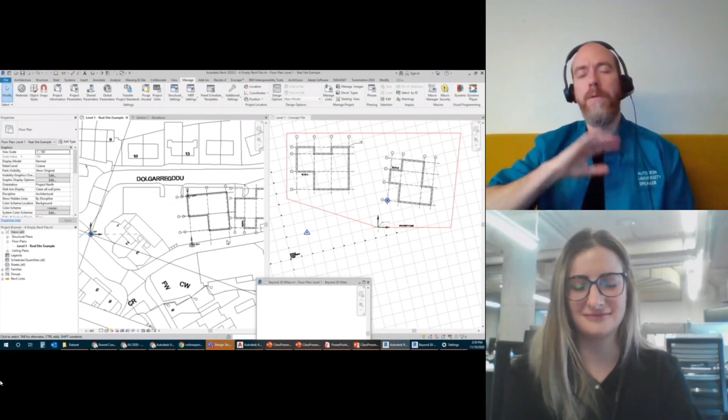Oh, that's a good one to end off with. If you're doing something like a very small retail project, or a lot of interiors projects—I used to work in interiors—if you're dealing with that and not doing real world coordinates, a lot of the time it's pretty easy to just do things origin to origin, make sure everybody keeps things that way, and you link the files and pin them in place. That would be the only case where I'd say keep it simple, don't bother with shared coordinates, just make sure everybody starts their files the same way. But at the same time, as I've said before, you won't catch things like if two files misalign. But if I was working on a very simple job like that, that's basically where I wouldn't use shared coordinates. I don't use them if I'm doing a little retail outlet or something like that—we would just link the files that way.